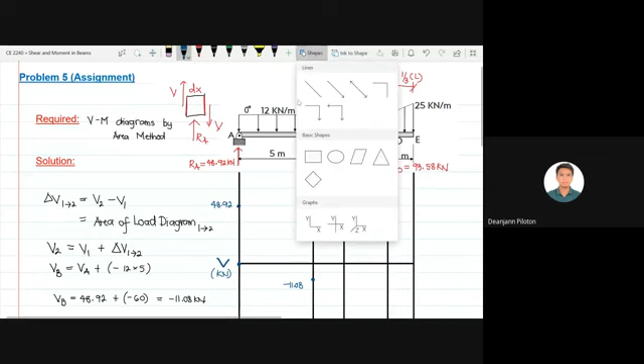So in your calculator, you can go direct, no need to write it all out. For example, you have 48.92, then you proceed to another point. So what you do is encode in the calculator 48.92 plus the change in shear, so plus the load diagram in that segment. So 48.92 plus negative 12 times 5, because the direction is downward. So you get a value of negative 11.08. So you can go direct without needing the full equation.

So try this as practice when solving other problems, to calculate directly using the area method, unless the area is hard to compute.

Okay, so after solving the shear at point B, next is segment BC. So for segment BC, we have no load here, zero degree here. So there's zero degree in the load diagram here. So that means, since there's no load, the value of the shear stays constant. So we just draw the shear diagram for segment BC as a horizontal line.

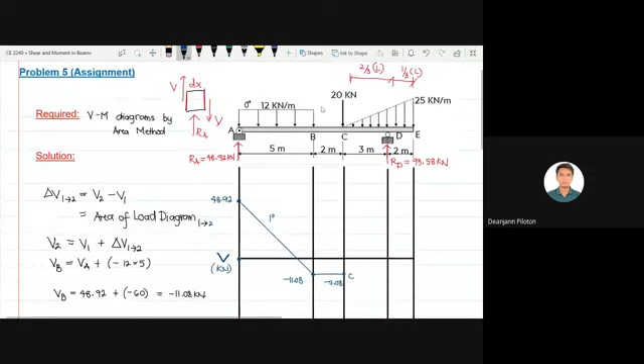Then after that, we have 20 kilonewtons. So same as with R sub A, a concentrated load gives a sudden change in your value of internal shear. So from negative 11.08, we apply 20 kilonewtons downward.

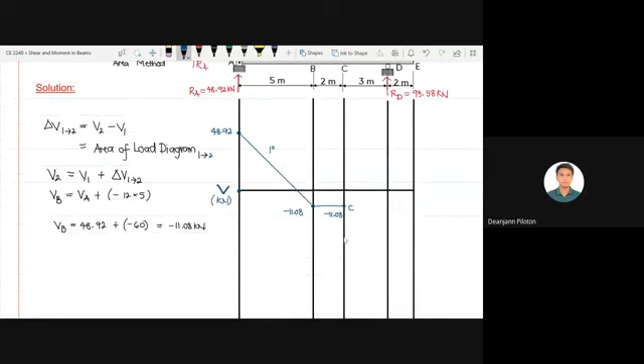So that means the change in shear is negative 20. So if negative 20 is the change in our shear, that means to get the new value of shear, or shear value just to the right of point C, what we do is negative 11.08 minus 20, or negative 11.08 plus negative 20. So our shear at C just to the left is equal to negative 11.08.

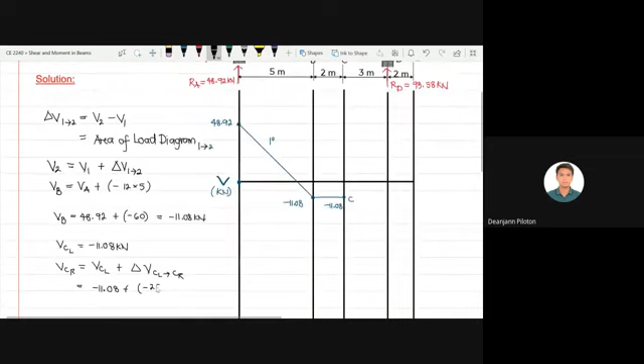Now let's get the shear just to the right of point C. So it's equal to V sub CL plus the change in shear from left side to right side. So that is equal to negative 11.08. Then the change in our shear is negative 20. So our shear at point C just to the right is equal to negative 31.08.

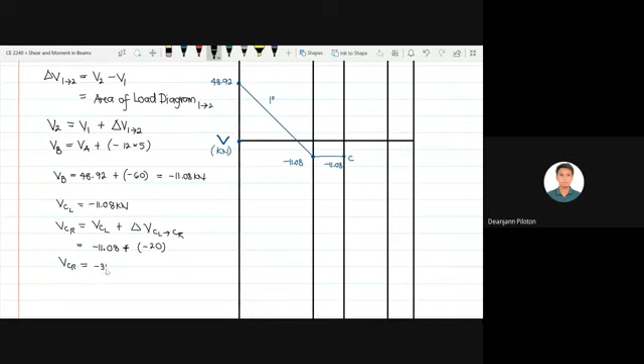So you can view this as: when there's a concentrated load, there's a sudden jump in your shear value along that line, and the change follows the same direction as the concentrated load. So negative 11.08 goes down, same as the direction of this force. So our value now just to the right is negative 31.

So don't just draw it any way. As much as possible, even if you don't scale it exactly, try to draw it estimating the scale of your drawing. So for example, if 48.92 is tallest, then make some adjustments in your drawing so that negative 11.08 has a shorter length. Okay, so try to estimate the scale of your drawing so the presentation of your diagram is more accurate.

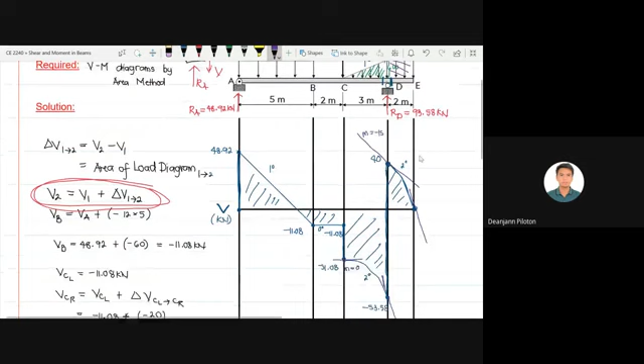So, ang slope ana is equal to the corresponding load. So, diri is 15, di ba? Then downward, so this is equal to negative 15. Tapos diri sa point E, drawing tag tangent line, negative yapon. So equal siya sa 25. So ang slope ani is equal to negative 25.

So ang slope nato equal lang sa load intensity. So kumbaga kani ang mag-serve na guide para ma-drawing nimo ang curve between D and E. Okay, so possible man gud na ma-connect nimo ang curve na baliktad ang concavity niya ba, paingani ang concavity. Instead na paingani. Dapat imasang i-tanawon ang slope nimo including katong sign. Magmatter ang sign sa slope kung negative ba or positive.

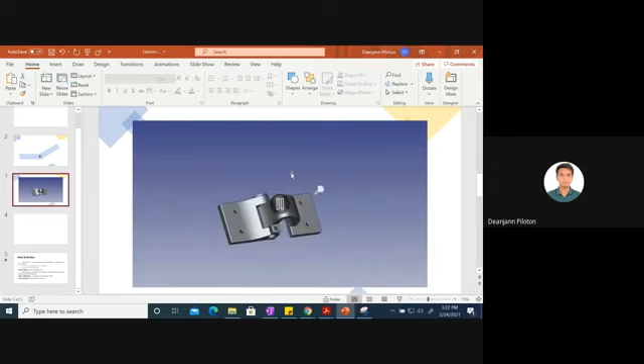So allowed siya mo rotate, so wala resisting moment na ma-create sa support. Hindi na kailangan mag-resist og moment ng support kaya gina-allowed niya ang rotation. So common example sa kanang mga pin is kanang sa hinge sa inyong door or sa mga simple machine na application sa hinge.

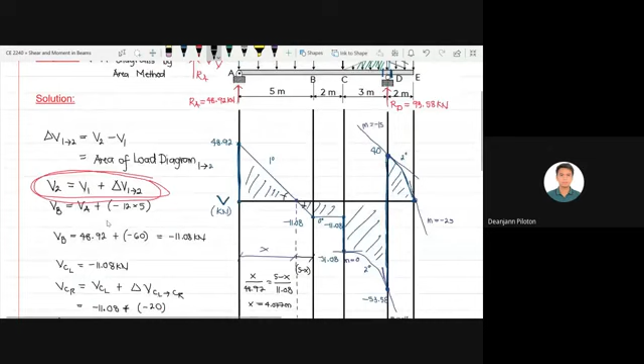Okay, so diri sa point A, wala man allowed ba ng rotation, wala resisting moment. So wala tayong ma-create na internal moment. Well, dili kailangan mo react internally pod sa beam. Diri sa point A, kay allowed man ang rotation. So zero atong moment sa point A.

Okay, next is from point A up to the maximum point. We need to get this value. So to get this value, let's let the value here be M sub max. So M sub max is just equal to M sub 1.

M sub 1 is 0 plus the change in moment. The change in moment is equal to the area of the shear diagram, so let's just look at the area of the bigger triangle. That is 0 plus the area of our shear diagram, which is positive since it's above the horizontal line. So plus 1/2 times 48.92 times x, where x is 4.077 meters.

So 1/2 times 48.92 times 4.077. So M sub max is equal to 99.72 kilonewton meter.

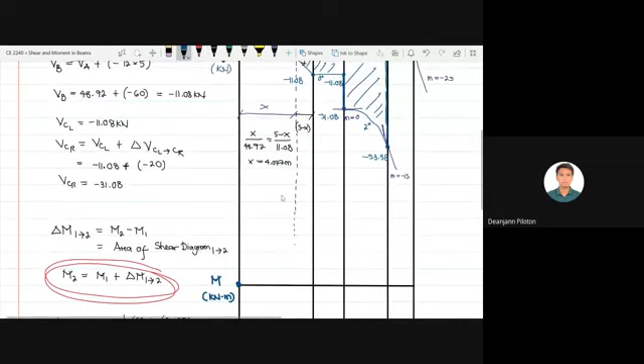Okay, so if we plot this, let's say this is 99.72. Next, let's connect this.

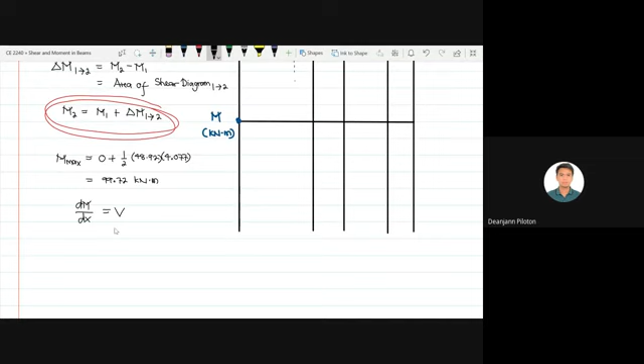Okay, so if we connect this, let's look again at the shear diagram, because the slope of the moment, again, the slope of the moment at each point is equal to the corresponding shear value. So for example, at 0 moment, the slope there is equal to the shear at that point, which is 48.92. So when we draw the shear, since the value is positive, the slope there is also positive. So 48.92, let's draw it like this.

Then we observe that the shear slowly decreases but remains positive, so the slope is positively decreasing. At this point where the moment is maximum, the shear is 0, meaning the tangent line is horizontal at the maximum point. So the slope slowly decreases, from this angle of inclination, it reduces its angle of inclination until it becomes zero. That's based on the graph of the shear on that segment.

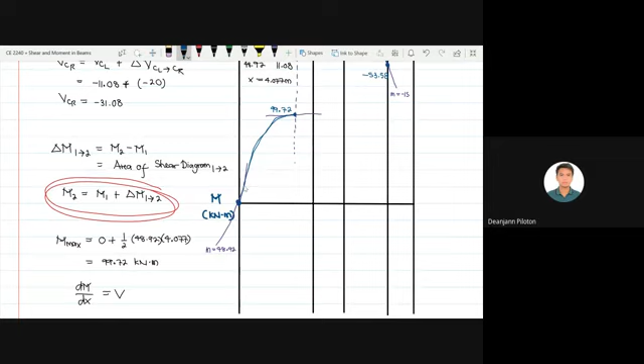So therefore, if we connect these two points, we follow the tangent line. Okay, are you following, class? Yes sir, hello, okay, sige.

So after that, let's go to the next point to connect. We use the load to determine the next point or the next value of the moment. So what we use is M sub B is equal to the previous value, applying the change in moment or the area of the shear. So in your calculator, you can input it directly: 99.72 plus the corresponding area of the shear diagram, that is 99.72 plus 1/2 times negative 11.08 times (5 minus x).

So what is 5 minus x? 5 minus 4.077, so 0.923 meters. Go ahead, class, in your calculator: 99.72 plus this negative area.

Okay, next from 72.45, this is a bit complicated. So the area we need to add is this negative area consisting of a rectangle and a spandrel. So let's isolate the spandrel and the rectangle. The slope is zero at this point, take note of this in the shear diagram.

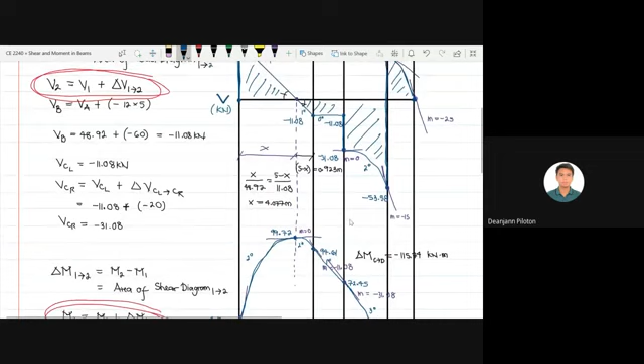Okay, so far halos makumpleto na itong diagram, no? Then next kailangan nato i-kuha ang area ni class. So kani siya is second degree curve. Just to check lang our answer, i-expect naman ko nato na zero na gid ang moment sa point E. So kung tayo lang nagadali na gid kag solve, kabalo na ka na diri mo landing. As long as confident ka sa imong solution, no, di na nimo kailangan i-verify. At least na naka-idea na kung tama imong gibuhat, diri siya mo landing dapat imong moment. So kung i-connect na nimo siya, ato lang sa daan i-connect ka sa before natin compute ng area.

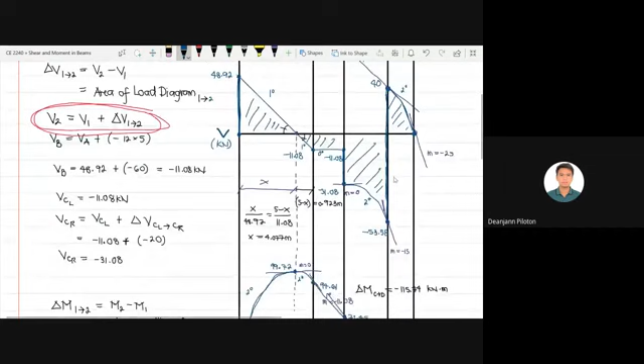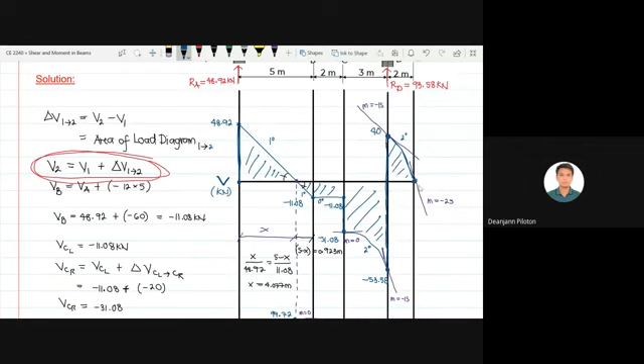Okay, i-observe nato ang value sa shear for this diagram. So natay positive 40 and then sa point E natay 0. Atong slope is positive 40 at this point. So let's say nga ni iyahang inclination siya positive 40. Tapos diri 0 lang, so mo tangent lang siya. Ay mo horizontal lang ang tangent line.

Okay, so kung i-connect na to, positively decreasing ato ang value sa shear within this segment. So atong curve is nga ni ang drawing. Dapat mo tangent siya aning horizontal line diri sa moment equal to 0. Kaning adjust. Ang degree na to is plus 1 lang. So if this is second degree, so this is third degree.

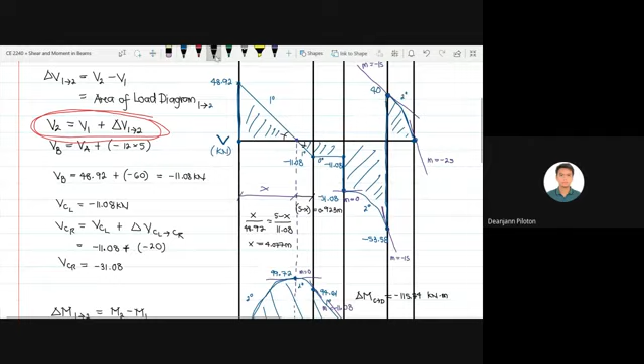Kana siya kung nagadali na ka, i-connect na nimo diretso sa 0 since kabalo ka na 0 moment sa E based sa given na loading. Pero kung i-compute nimo ni class, ano man ni siya kaning sa gikan sa parabola, pero di nimo diretso ma-apply tong 2/3 sa formula. So i-isolate lang sa nato ni na drawing ha. Kana man good siya is ingani ang drawing.

Katumang 2/3 na for parabola, magamit lang to nimo kung na-include nimo tong vertex na naay slope na 0. Example is ingani na parabola na segment. Ingani siya, pwede half, pwede po katong tibuok. Kanina area yung compute. As long as ang importante is kaning vertex is included siya na either ang slope niya sa vertex is 0 or undefined. So pwede horizontal or naka-vertical ang slope. Pwede man another orientation aning formula sa parabola na area. So pwede na ang orientation niya is nakaingani po ng parabola, na ang vertex niya is nadiri, tapos ang tangent line sa vertex is vertical, na undefined ang slope. Okay, so ang gamiton mo na formula to compute the area is directly 2/3 times base times height.

Pero sa ingani na case class, wala niya na-cover apil ang vertex na ay 0 na slope. Ang slope gani diri is equal to negative 15. So therefore, kailangan nato i-analyze ni by trigo. Baga himay-himayon din nato ni siya. Okay, so sa kanina...

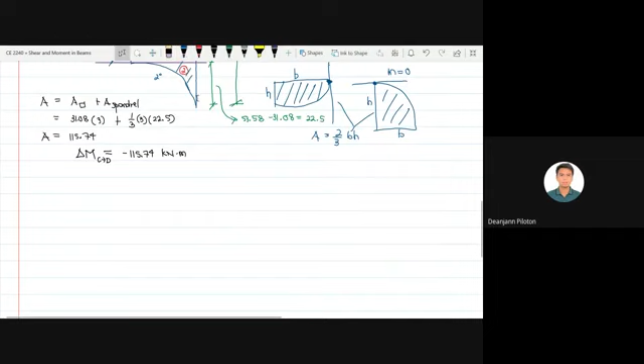Ang buhaton nato una class sa kanina area, isulod nato ni sa rectangle. Muna na ako. Okay ba ta, class? Ising ba ta? Hello? Ising ba, class? Yes, sir. Okay.

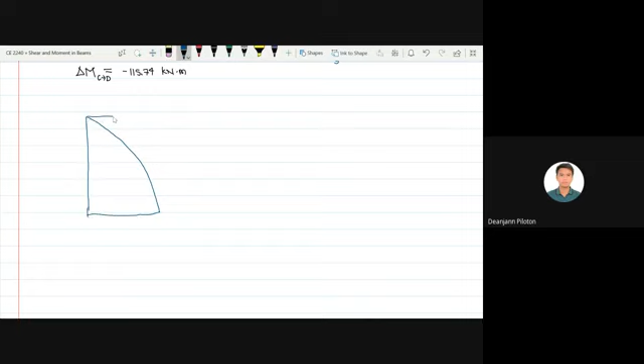Kanito ang area na itong gina-consider. Isulod nato siya sa rectangle. So I think na yung mga line-line ways na isolve niya siya. Kani is one of the common ways na ginagamit. Naapod ka tong by analytical na equation dyan. Kani siya is by figure, by trigo.

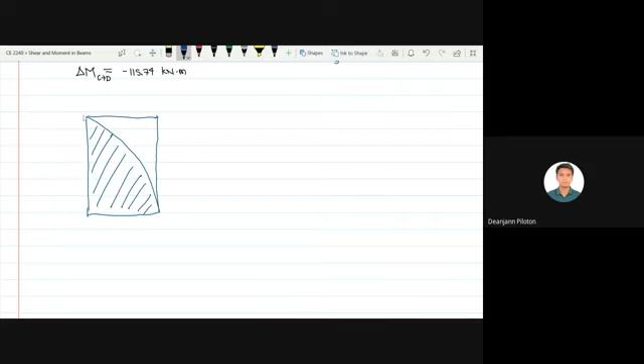Okay, kani siya na side, ang yang length is equal to 40 based sa shear diagram. Kani siya is equal to, so this is 40, and ang horizontal na length is 2 meters, so equal to 2. Tapos natay tangent line. Diri magamit na tong tangent line. Kanina tangent line is ang slope ani dili equal to 0. That's why ginahimay-himay pa nato siya solve. Okay.

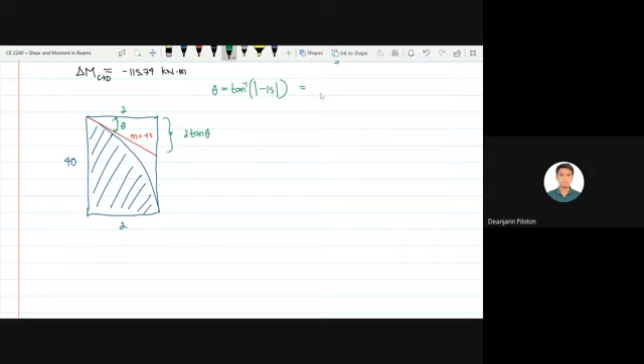This is let's say angle theta. Target nato kaning shaded area, and if this is equal to 2, so this length must be equal to 2 tangent theta. Atong theta, class, ang value niya is just equal to arctan of the slope. Ibang slope ani is negative 15. To compute the theta, kailangan naman natin is magnitude no sa theta. So i-absolute value nato ning negative 15. Okay, so absolute value of negative 15, kuha na nato is positive value. So this is also equivalent to arctangent 15. Kuha na nato ang value sa theta. Sige, class, what is the value of theta? Arctangent din siya, arctangent. Arctangent of positive 15. 86.19. Okay, so 86.19 degrees.

So this side is equal to 2 tangent 86.19. So this is equal to 30.03. Tapos kanina side is equal to 40 minus 30.03. So this is equal to 9.97. Now to solve for this area, so to masulat na equation is that that area is equal to the area of the rectangle, buong rectangle. Then minus natin yung area ng triangle, class, and area of this spandrel. So area sa rectangle is kanin siya, diba? Then ang area sa spandrel is kani.

Okay, so area of the rectangle minus area sa triangle minus area sa spandrel. So ang equation nato karon, class, is equal to 40 times 2 minus area sa triangle, that is 1/2 times 2 times 30.03, and then minus area sa spandrel, class, na second degree curve.

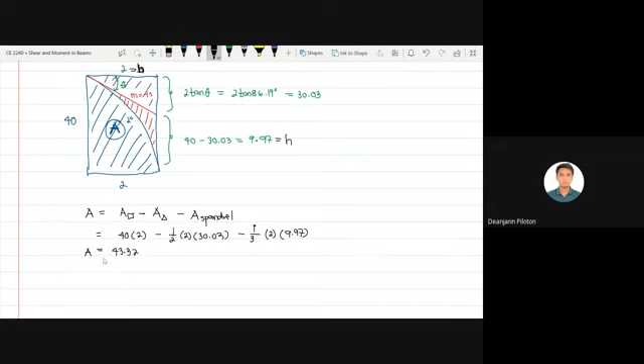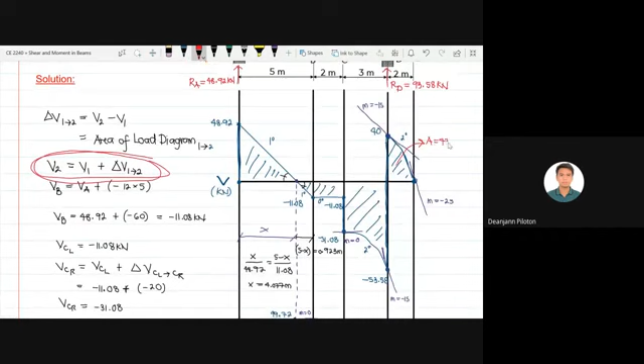So therefore, kaning area ani, balhin na lang nato. So kaning area is equal to 43.32. Then kung atong i-confirm, so kani siya negative 43.29, di ba? Then plus the change in that segment sa change sa moment or area sa shear diagram, that is 43.32. So naay mabilin na gamay decimal, 0 point something. Kato siya is because of the decimal places, dili man exact value kita na natong ipang butang sa atong solution, so that's why naay gamay na discrepancy. Pero approximately equal to 0, so at least ma-verify nimo na tama imong answer.

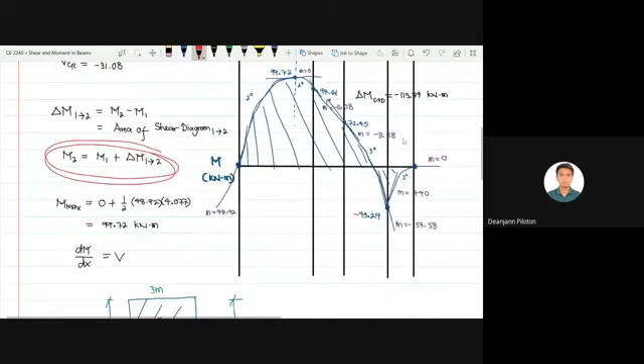So when it comes to computation sa area, class, naa may question ani.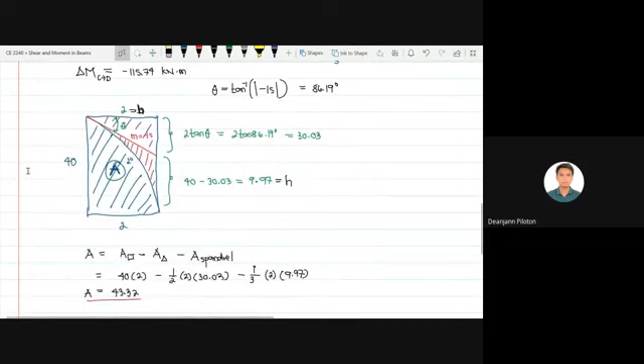Sir, ang area sa spandrel, sir, kanang red lang na? Yes, kaning red lang. So kung i-isolate nako siya, kani iyang itsura.

Ana siya, then ang altitude man gud natong gigamit is kanang na-compute na nato ato 9.97. Ani siya, so ang ipares nimo ani dapat is a horizontal dimension of the spandrel na perpendicular sa altitude, which is kani man tong perpendicular sa altitude equal to 2. So kung kani mong AH, kani imuhang 2. Pero kung example lang naani siya na value kaning slant na gusto nimo kaniyang gamiton, kailangan i-compute nimo ning perpendicular sa iyang altitude.

Which is mali diay, class, no. So kani siya, then ang gamiton nimo na horizontal length, dili lang ka diri mag-stop until diri siya, until dira, mao na horizontal, ang magsilbi na base niya perpendicular sa altitude na gipili.

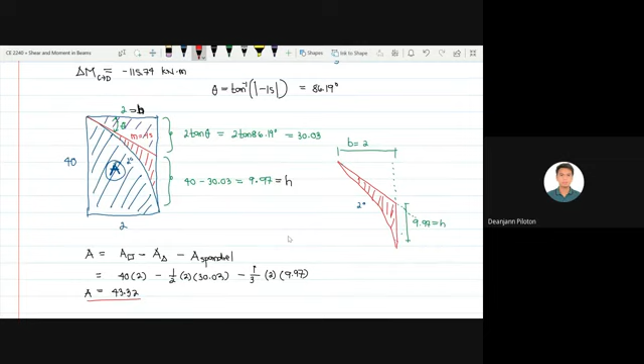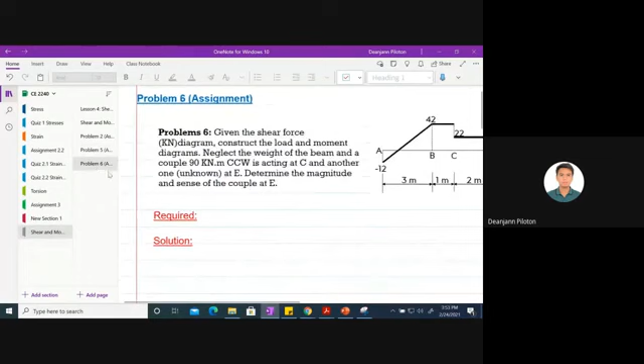Okay, so kana nato ang moment diagram, shear and moment diagram sa problem 5. Class, last na lang gid, singit lang nako ni, dili man ako i-solve tanan. Kani mag-good is pabali na-answeran ninyo ni sa assignment ninyo, class. Ka-answer ba mahal sa tanan? So anyway, tanawon pa nako inyong papers.

Sige, so i-present lang nako ang akong solution sa kanila nga problem. Ang i-solve lang nako diri is given the shear force diagram, ang solve nako is katong load diagram, katong itsura sa beam.

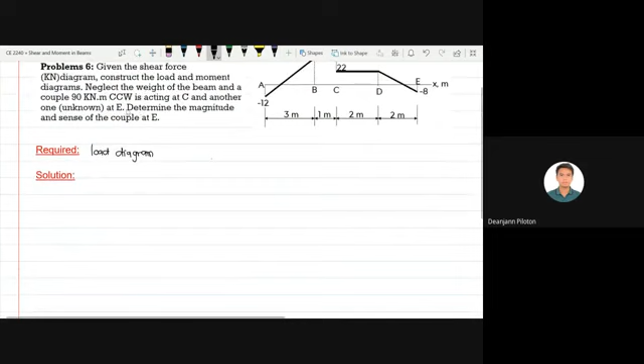Okay, so sa solution, ang isa ka required, class, is to draw the moment diagram. Ang buhaton lang man na as long as naa na kay load diagram and shear diagram, so ma-construct na nimo ang imong moment diagram. So para sa load diagram, ang tan-awon mo unsa to mga concentrated couples. Okay, maka-affect man gud to sa imong moment diagram, mag-cause to siya og sudden jump sa imong moment values.

So let's say kani ato ang beam. So from point A, class, yung naog kalit ang atong shear, no? Ano siya, is shear diagram man eh, yung naog ang value niya from 0 to -12. So na-sudden change sa point A, so that means na concentrated load dira sa point A na downward, ay, from 0 to -12 ang iyang decrease. So that means na atay 12 kilonewton force diri. Tapos pag naog yung 12 kilonewton, naana po tayo another change, no?

Na first degree, so that means atong load diagram class must be 0 degree. So uniformly distributed na itong i-expect sa atong load diagram. Kumbaga pa, bali lang atong mindset ani, class.

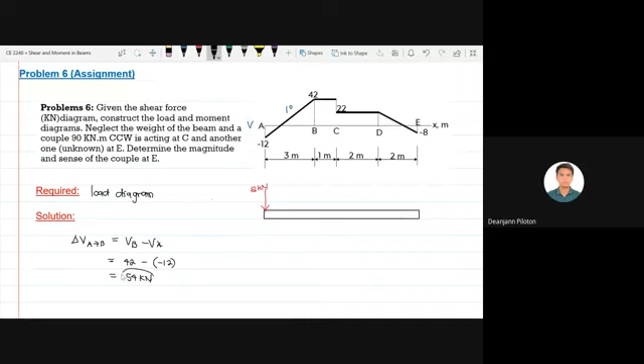So i-distribute natin ni siya sa kanina length. So ang buhat na nato is drawing na nato ang atong, and take note, positive, class, ha, positive ang sign sa change sa shear. So that means na uniformly distributed, directed upward from A to B. So ibutang lang ako diri ang uniform distribution. Then ang load intensity niya, class, is 54 kilonewtons distributed sa 3 meters na length. So load intensity niya will be equal to sige daw, class, 54 divided by 3. 18, sir. Ha? 18. Okay, so 18 kilonewtons per meter.